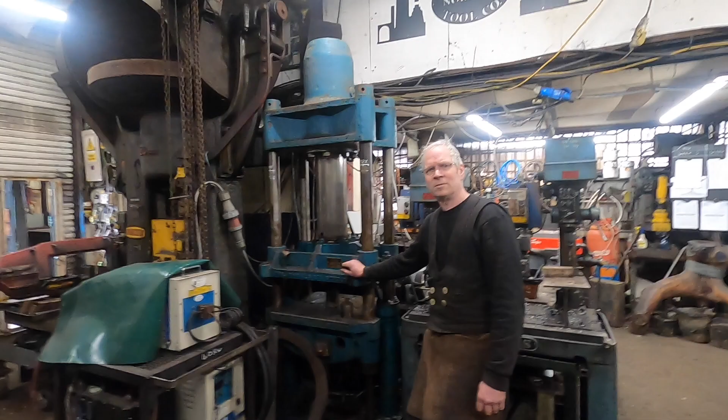Today I'm going to show you a bit on our plasma machine that I built, a little plasma cutter, and I'm going to make backs for ST range motor guards. So if you come through here, look, I'll show you the hammers.

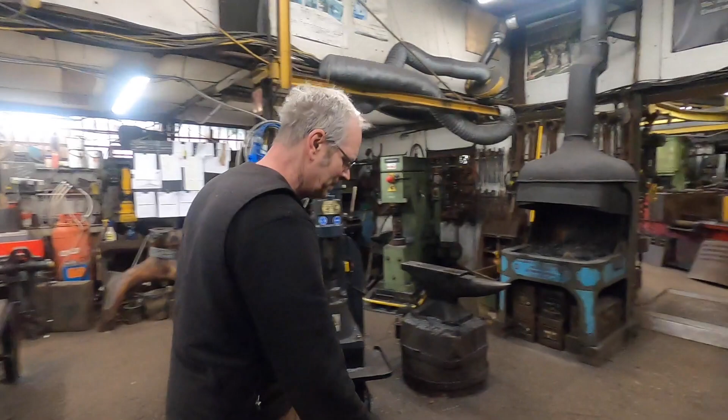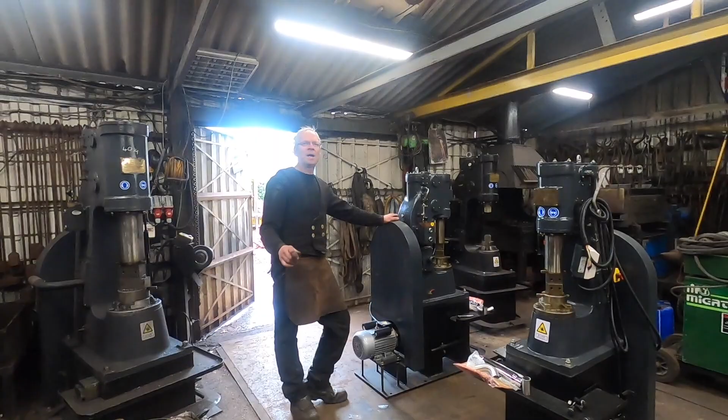So when we mod the hammers, when they come in, I put a motor guard on the back to protect the motors, which we cut out on our CNC machine. I bought a CNC machine, it was terrible. It had no height control on it, it was made badly. So being a blacksmith, if one person made it, another one can make it and copy it.

So what we've done is, I made my own machine, and I'll go through and I'll show you. It gives us a really nice cut. A machine of the size that we made costs around £30,000, and I made it for £6,000, and we got all the bits from CNC4you, and I bought the best stuff that we could get. So come and have a look.

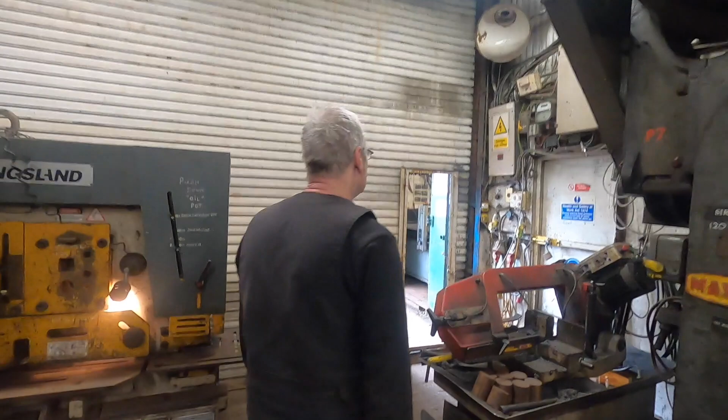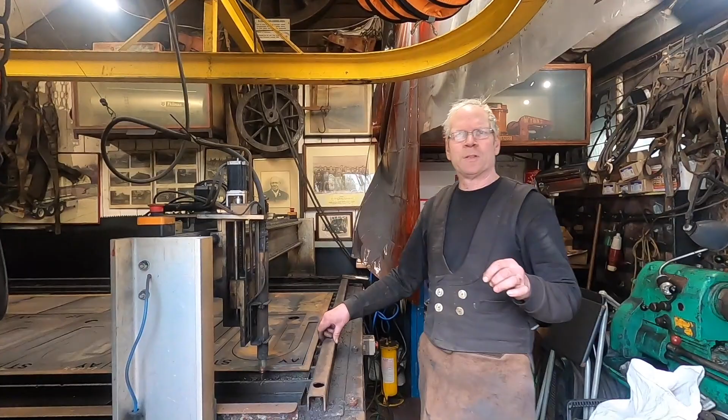In a minute we'll show you the machine cutting, but I designed it all with a water table on it so that all the fumes go into the water table. I've got on-torch extraction, which is not connected, we've just put it there out of the way for the moment. I've also got extraction in the building which sucks it through the back, and then there is a filter system where it will take any metal particles out.

It's really important when you use them. When the lass works them, I've got an air-fed mask. So it's fully filtered air. You shouldn't breathe in any of the oxide off of the machine, it's really bad for you. But that's the same filter system as we use for sandblasting.

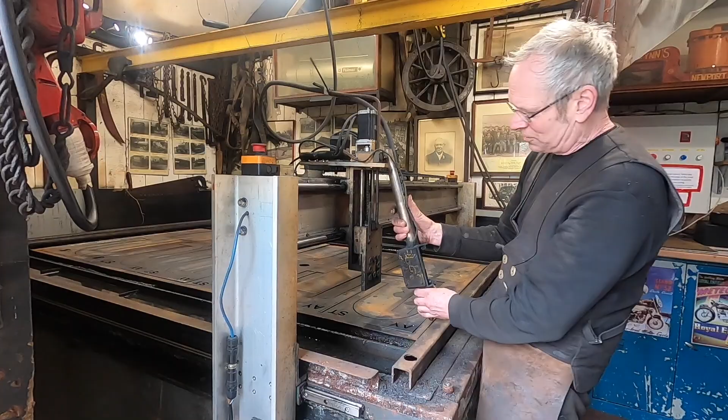Now the head I designed so when the access point comes, if it hits, we've put micro switches on, there's magnets that hold it on. So I've got neodymium magnets on there which are really strong. I've done this years ago, now they're all the fad. And then if the torch head actually fouls, it'll pull it off the magnets without breaking the torch, and the sensor switch on here just shuts the machine down.

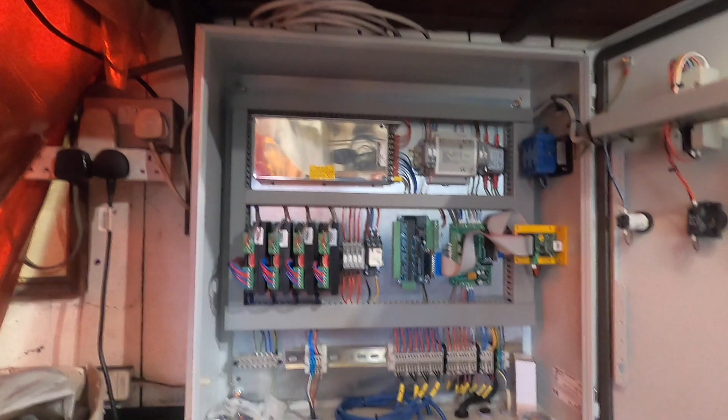I've got the best quality runners on the side that CNC4you done, and all their drive motors. And then this top is off of a router system, so I can actually put a table on top of here and use it as a wood router. Now I had somebody help me, a great guy, do the wiring, and all the wiring is in this cabinet. So all the drivers are in the cabinet, away from any dust. And all we do, you'll see in a minute, is we plug the laptop into it and away it goes.

Now the actual cutting machine is in here. So I've got a Hypertherm PowerMax 1250. I've got a 1650 there, and I just changed the unit, and I can cut up to 3/4 of an inch thick and then down to as thin as we like.

I've got a spare torch that hangs up in the roof. I've got a PowerMax 45, which if we do loads of really fine work, we put a tiny torch on. But most of our work is 10mm, 12mm, maximum probably 16mm. It's only when I want really big plate I'll change that one over. The cut on it is superb really for what it is. So if I take a piece out,

we used to run on Mach3, but we now use UCCNC, which I really like. It was a much better program really for what we do. We still have SheetCam that we do our programs in, but the machine runs on UCCNC. So if you have a look in a minute, we'll set it up and I'll show you these being cut out.

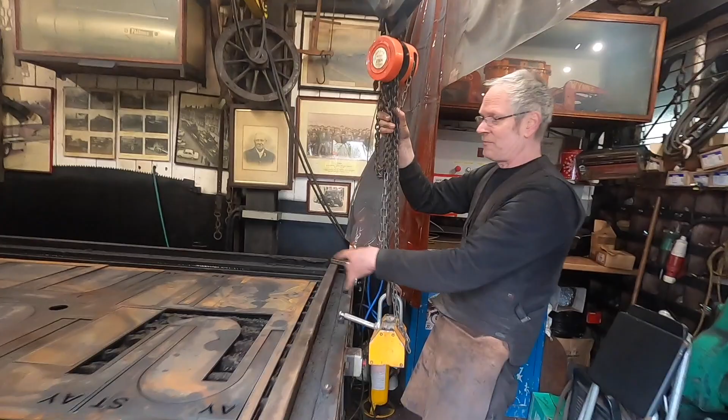Right, this is another little thing we put in because I'm lifting 10mm sheet and it's quite heavy when the door's open. I've got a plate magnet and then this tracking we put in so I can pick a sheet up and swing it around on the table. So I ain't got to rely on the forklift, I can just swing it around on the track, put the stuff on the table and then pick it up. So these are great. This lifts over half a tonne.

Yeah, don't hit yourself in the mush with the chain. Not a good idea.

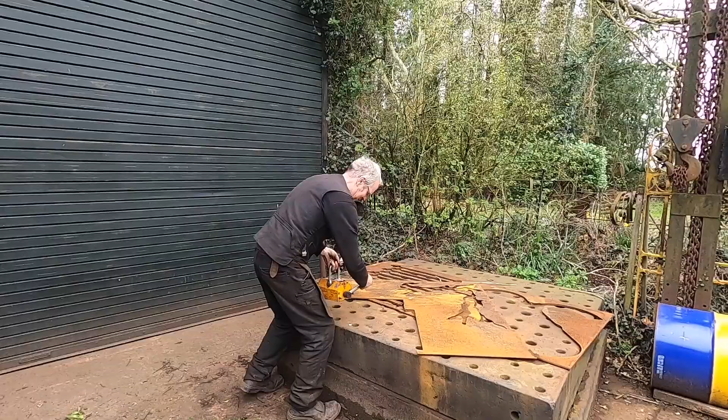I'm just going to play with the magnet on. No chance.